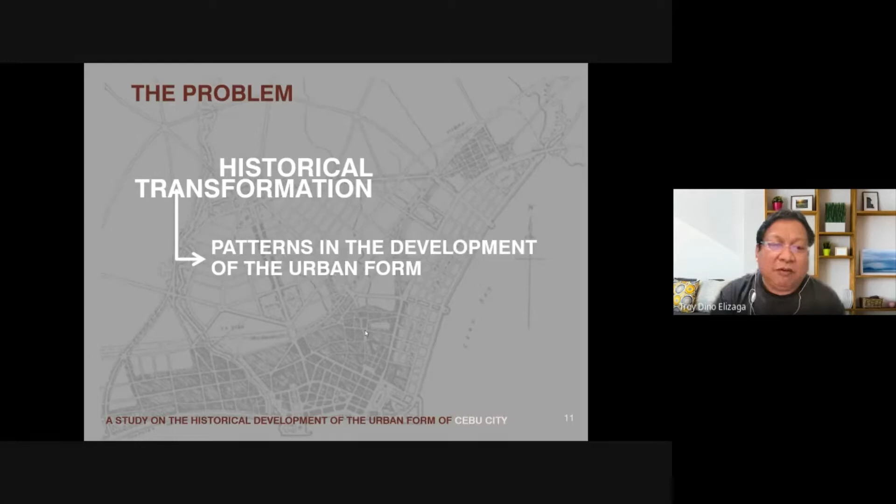So historical transformation means that we have to be looking for patterns in the development of the urban form, and also try to know the historical development in economic, environmental, and socio-cultural aspects.

This study was limited in terms of area, which is the urban area only of Cebu, not the rural area. We're also limited by the availability of old maps, and the boundaries are not so clear in some barangays. There's also an analysis of street and plot patterns involved.

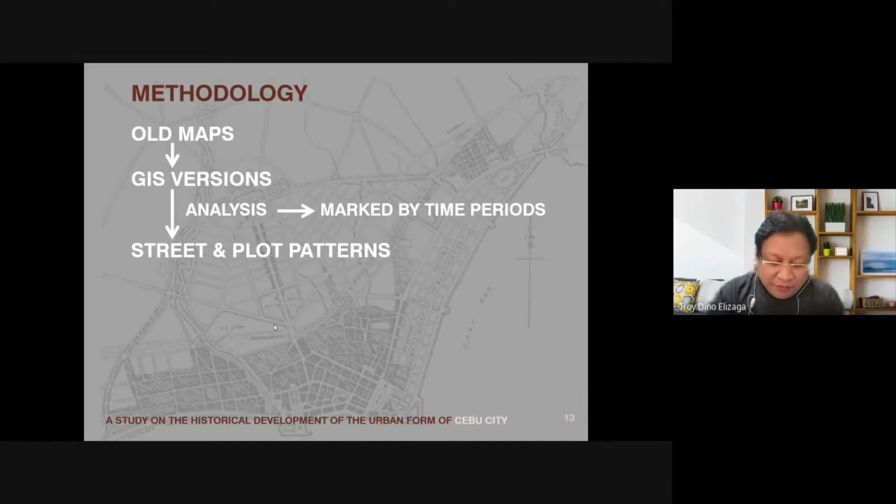Basically, from the old maps, I made a GIS version of the map, and afterwards I analyzed the maps, the GIS version, analyzed the street and plot patterns, and then tried to make time-different maps for each time period.

I also studied historical accounts, so that I can determine the changes through time in terms of economic, environmental, and social cultural aspects.

Let's go. These are the maps that I had to consider. There were more maps, but I had to choose what can be useful in my study, what can be translatable to GIS, because some maps were actually just sketches, some were meant for naval navigation, and some were different.

So I ended up with like 16 maps, but from there I was able to generate a map for this particular time period from 1700 to the year 2000. But skipping some decades, I only ended up with like 10 maps.

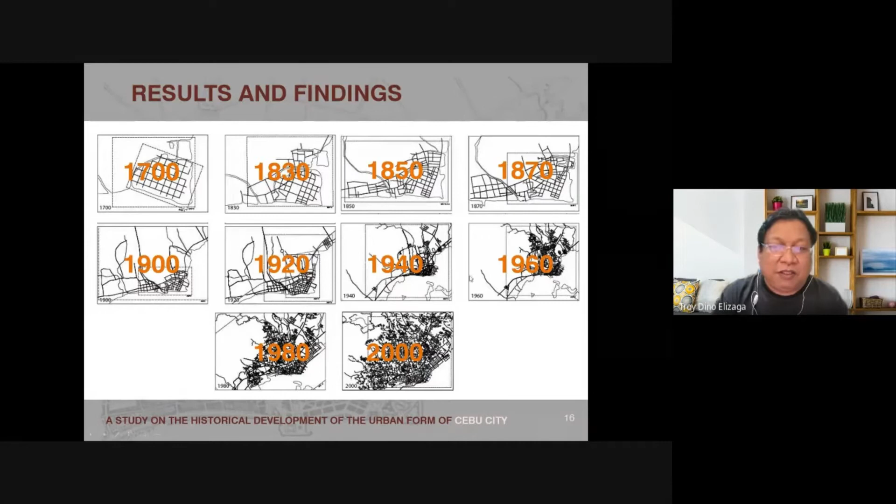So these are the 10 maps. It starts at 1700 - we only have this for Cebu City, for Cebu, and now it's this big. Then we have 1830, 1850, 1870, then the American period: 1900, 1920, 1940, and during Philippine independence already 1960, 1980, then year 2000.

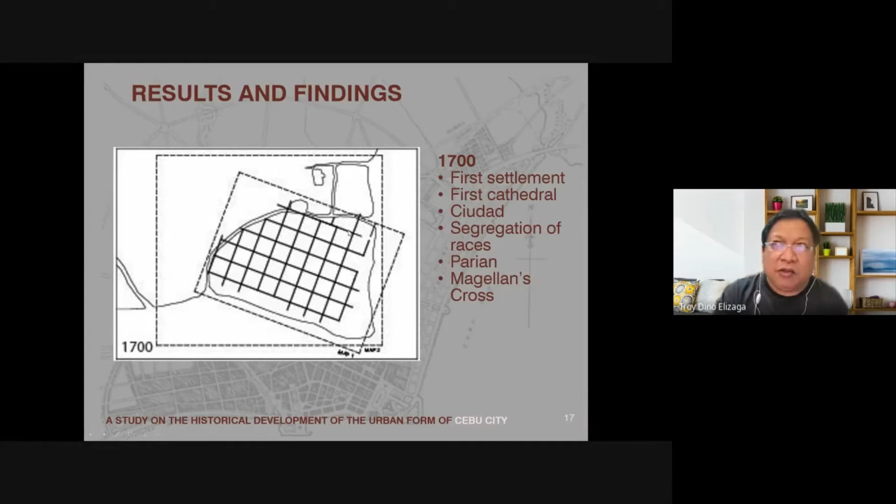So 1700, you can see this part of Cebu - if you don't know where this is, Fort San Pedro is right on the tip here. So the City Hall is somewhere here, Carbon Market is somewhere here. And there's actually a river that enclosed that development. So this is like an intramuros without the walls - intra-rio, inside the river, instead of intramuros because muros means walls.

Much later, the Spaniards had this policy of segregating different races. The Chinese were placed on the north side, so this is Parian. And right across the river, all the Filipinos were placed there. So actually this became San Nicolas, although later on the boundary receded somewhere even further. That's why in the history of Cebu, the San Nicolas area was called Ciudad Antigua - the ancient city - for the Filipinos.

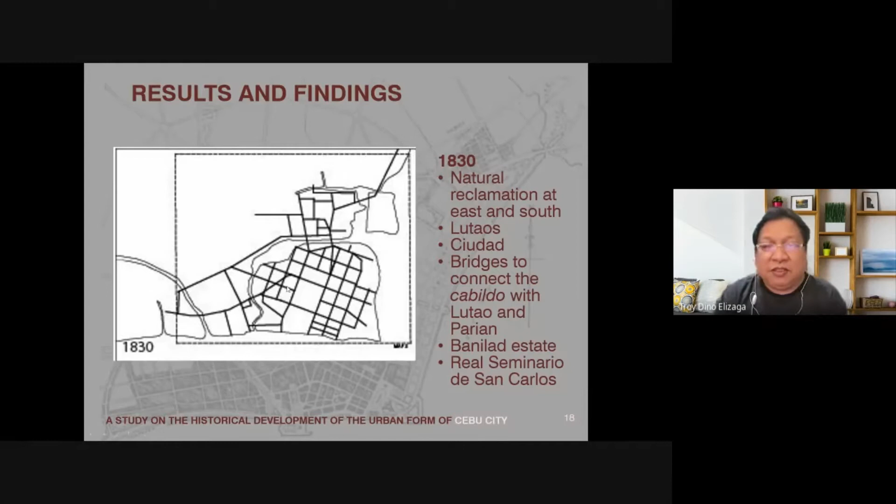You can see how much the development went much later. It is more pronounced in the Chinese area because they have more money. Normally the trade would be between Chinese and the Spaniards, and the Filipinos and the Spaniards, but we cannot avoid Filipinos also doing business with Chinese.

So there was actually a road that connected the two communities later on, outside of the port area, and this is actually Colon - Colon Street that connects. That's why for me, Colon is very significant, because it connected people, aside from separating Spaniards from the American development later on.

In this time, 1850, there used to be a church in Parian, said to be more beautiful than the cathedral because a lot of money was poured into it, since this was the Chinese community. The bishop of the cathedral was said to have had this Parian church destroyed so that the Chinese community would now go to the cathedral, and the money would pour into the cathedral instead.

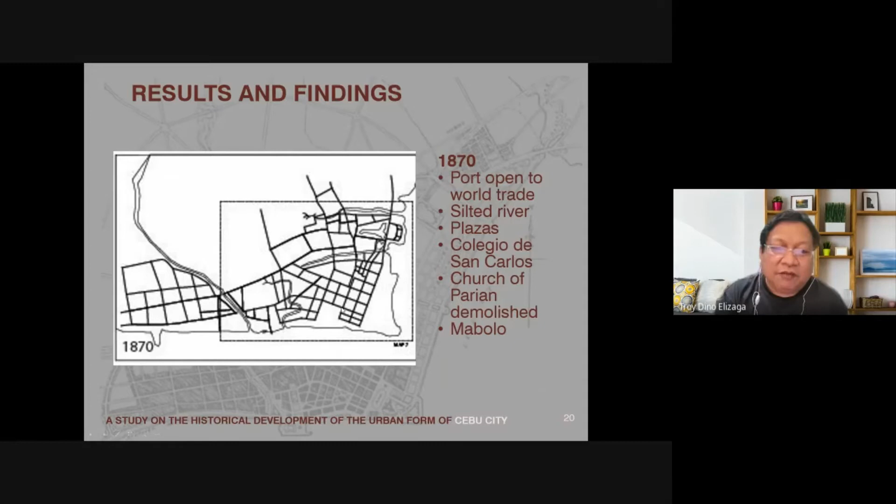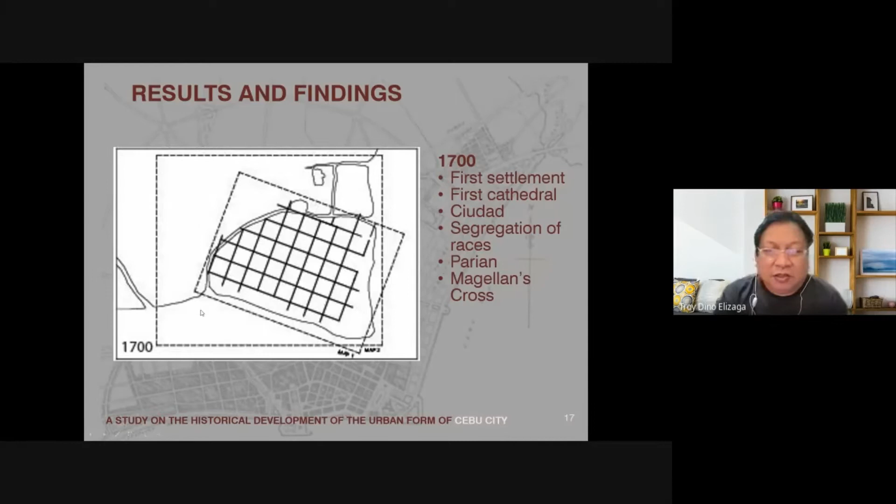Here the port opens to world trade, and if you notice, the coast changes over time. If you go back to here, notice that it's only here. Because the current comes from the west going to the east, this becomes silted and expanded, so you actually have more developments there.

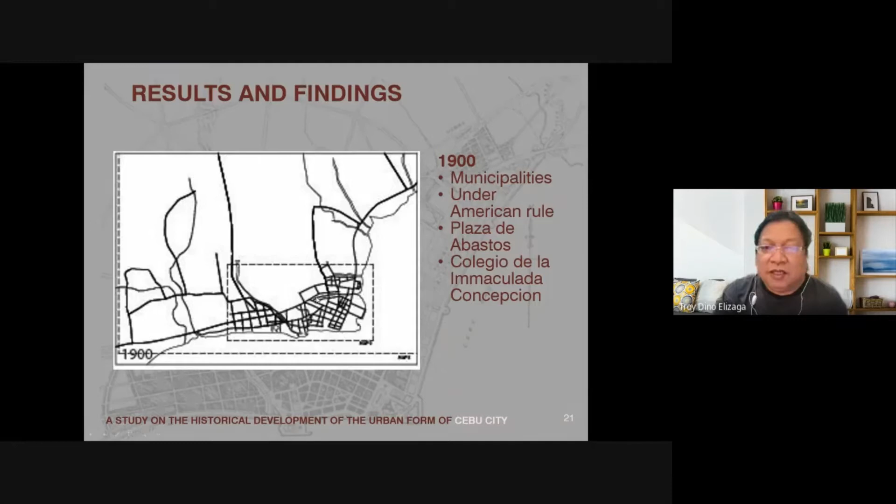1900 is when the Americans took over. The first thing they did was, of course, put in roads to expand to the other parts of Cebu. So you see here the road going to Guadalupe. William Parsons - I mentioned him in one of my lectures about American period heritage resources - made a plan for Cebu. It was during this time also, in 1910 I think, that we have the Fuente Osmeña, which is the first waterworks system in Cebu.

And then there's this big avenue here - it used to be Jones Avenue, now I think this is Osmeña Boulevard. He made a plan, but it was not followed, because when he made the plan, he drew it only on paper and assumed that the whole of Cebu is flat. But some parts of Cebu are actually not flat, but rolling, so some of the roads he was contemplating could not be built.

Also around this time, there was a railway station, a train. There's a railway that goes from north to south, and that also goes inside towards Carbon Market. Cool, no? Carbon Market has a train going there. Now that they're trying to rehabilitate Carbon Market, they should have placed something like that, a train, just to...

...recall the old times. 1940 was said to be the golden era of Cebu. That's the year, at least a decade maybe, that Cebu was chartered as a city.

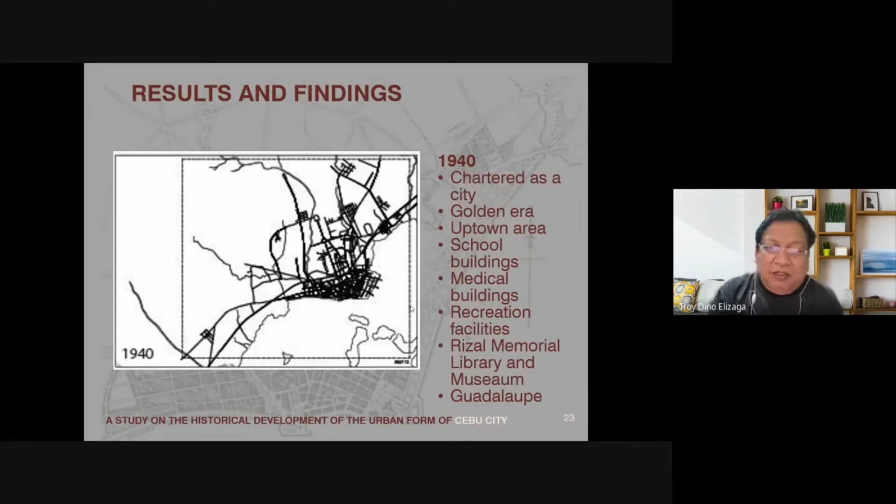The Americans were building many things: medical buildings, recreation facilities, museums, libraries. After the war, Cebu was devastated - I think you've seen a lot of pictures of that. The Americans helped put in a lot of money to rehabilitate the city, but the pace of development was not so fast, so people became impatient and tried to develop on their own, to build outside the plans of the government.

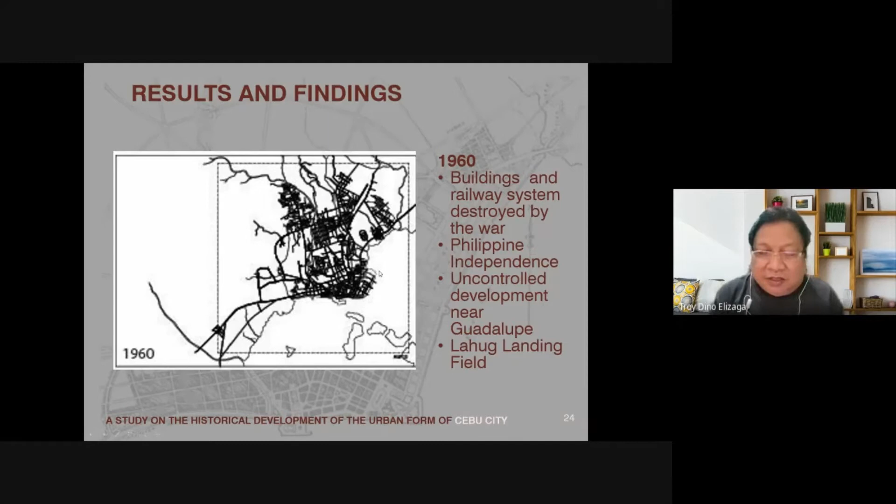That's why you're starting to see some portions here which do not seem to be well planned. The government was not able to control the extent of the development, so that's what happened here.

The government tried to put in, in this case 1980, a reclamation project in the north, which was too soon. In fact, until now this part is not built up. There's still a lot of land available due to speculations, unlike the South Reclamation Project.

Something happened during the 1990s which was very important. There was a very big storm that hit Cebu and really devastated it. It was Ruping, I think in 1990. That's why I don't have a map of Cebu from that time, because Cebu was not mappable. Everything was really destroyed, although what destroyed it was simply wind and rain, not like Tacloban with the storm surge.

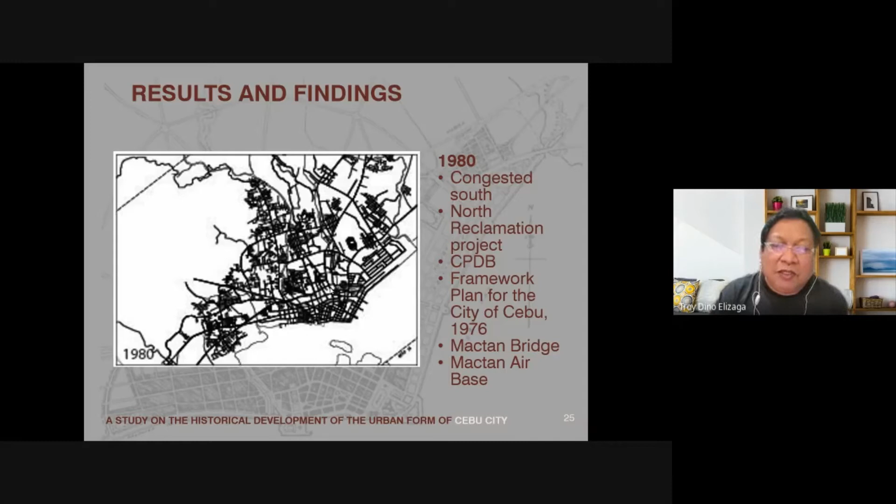For a couple of months there was no electricity, no water. The governor at the time was Lito Osmeña, and he decided to rebuild. His battle cry at that time was 'Ceboom!' So that's where the term comes from, if you ever hear about it. And it was really successful.

Cebu became what it is now, almost like a small Manila, except that the development went so fast that again the government was not able to control people building here and there. So it spread—that's why the map of Cebu looks like this now, really topsy turvy.

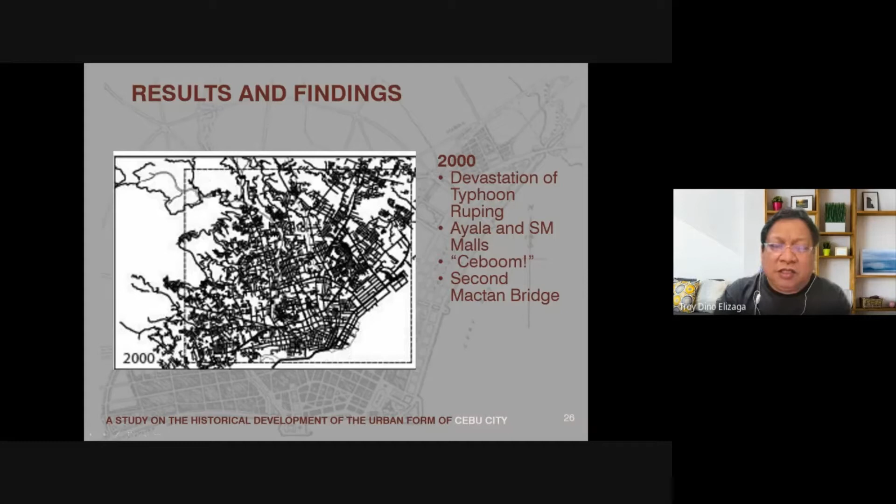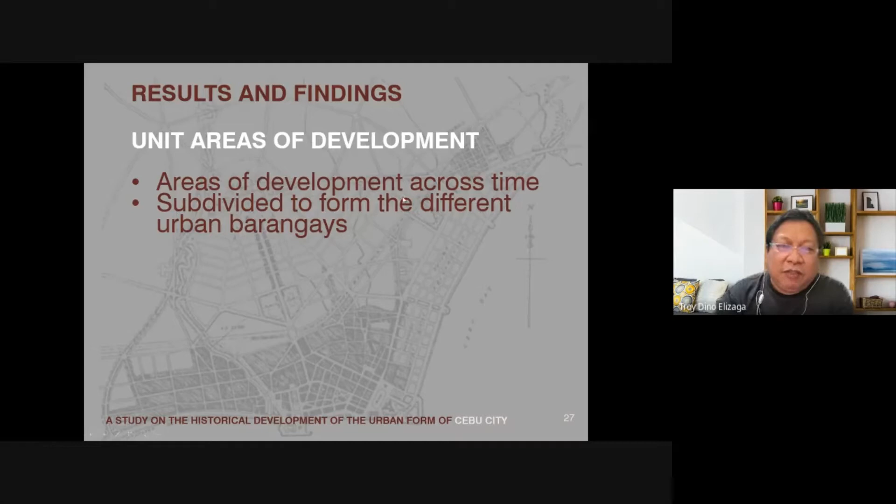After having made those maps, in order to analyze them you have to break them down into small areas which I call unit areas of development—areas of development across time subdivided to form different urban barangays. For example, at this time there were three unit areas of development: this is the Spanish, that's the Chinese, and then the Filipino.

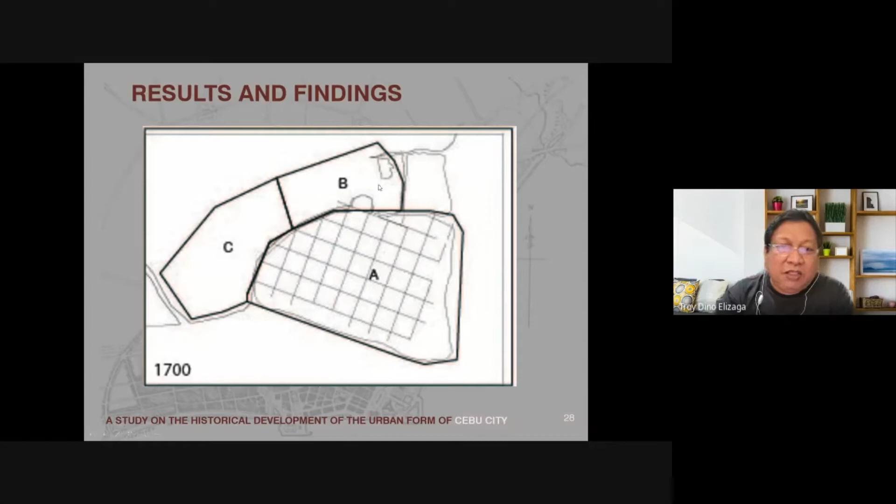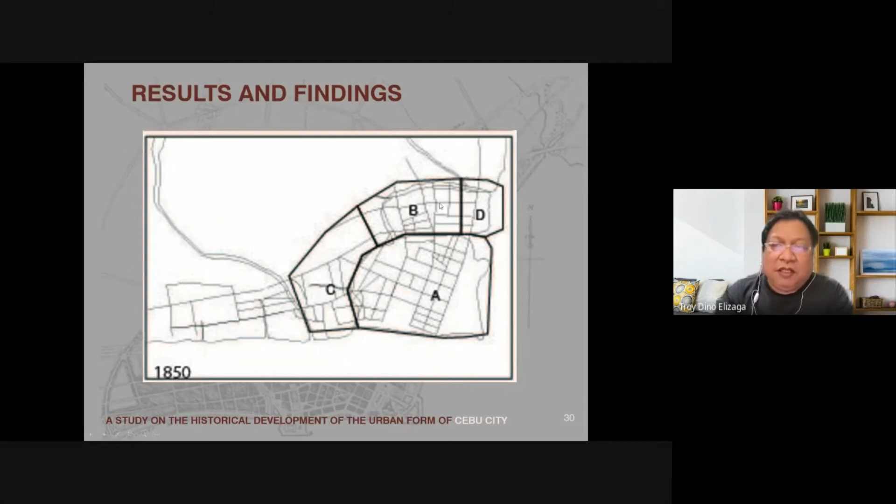Then they expanded, but another area was introduced because these are made up of lutaos or the bajaus, and they're not the same here, so it's not an expansion of B—it's a different one. So they expanded also, and new communities formed here and around, and so forth, until we form this one.

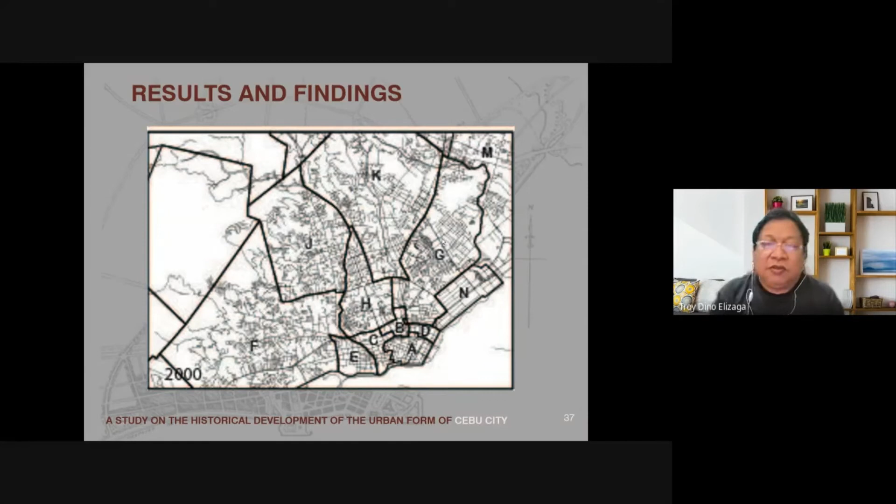Because of the pressures of time, these areas were very big—they were not broken down into smaller barangays. I did not have time at that moment.

Afterwards, the next thing is to evaluate each of these areas to determine what level of development occurred during that time period. That level of development makes use of transect zones, which came from form-based codes.

Form-based codes is something you will learn probably in Planning 2 or 3. It's another way of planning, other than zoning, and it's used also to evaluate existing communities and existing developments. It's very interesting—I'm really into it.

In that form-based code, there was a categorization of development into transect zones, depending on how many houses and how many streets there are in an area. In the natural T1 zone, there are no houses, no streets. Then you have rural with maybe one or two, several in suburban, and then general urban, slowly rising to high-rise in the urban core.

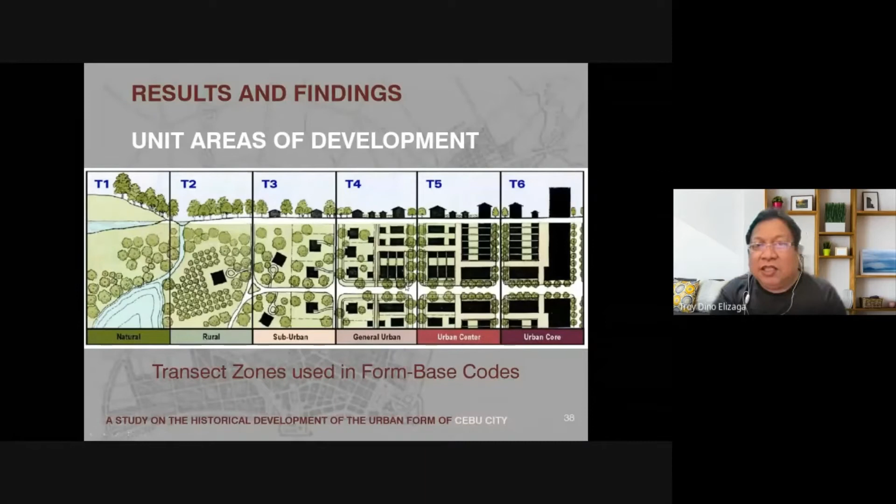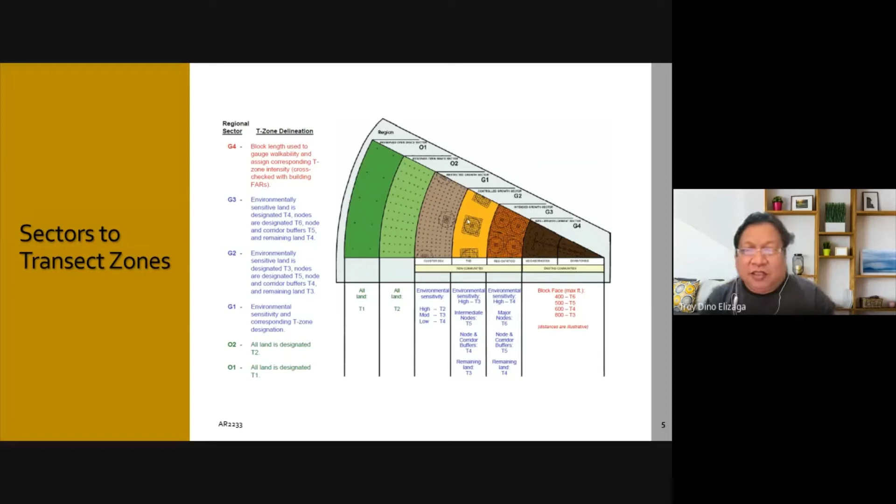So residential development is allowed only from T2 to T6. It's not allowed in T1. Well, maybe this is not very useful, but I really just find this cool.

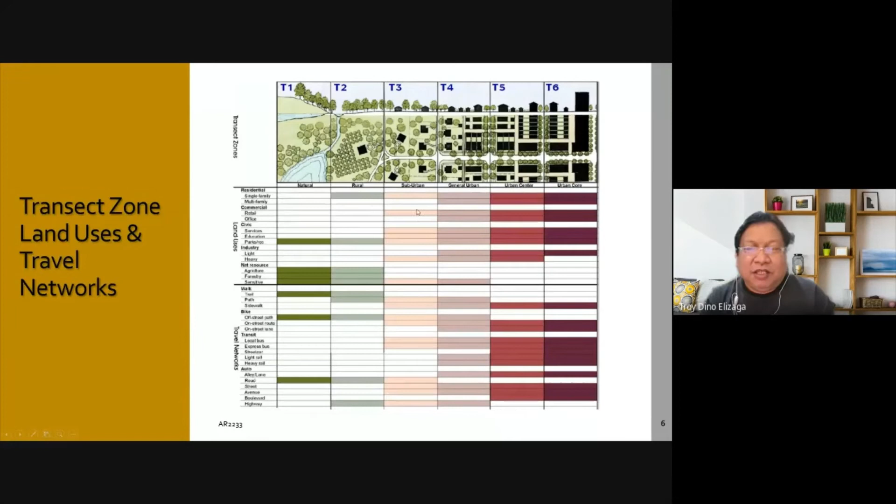So if we are going to design for circulation, our first consideration would be people, and how people travel is by walking. So we have here a standard: a 5-minute walk, which is 1/4 mile. I think 1/4 mile is something like 200 meters.

And then there's also the long standard, which is half a mile. This is 1/4 mile, so this is half a mile. I think this is like 400 meters.

This is normally the standard used for walking towards, say, the train station, but we don't have a train station, and Cebu does not have even buses in the city, so this is normally used as the typical walking distance for neighborhood and bus stop catchment areas.

So the bus stop, or the jeepney stop in our case, is the one in the middle, and it should be accessible by people around a 1/4 mile radius.

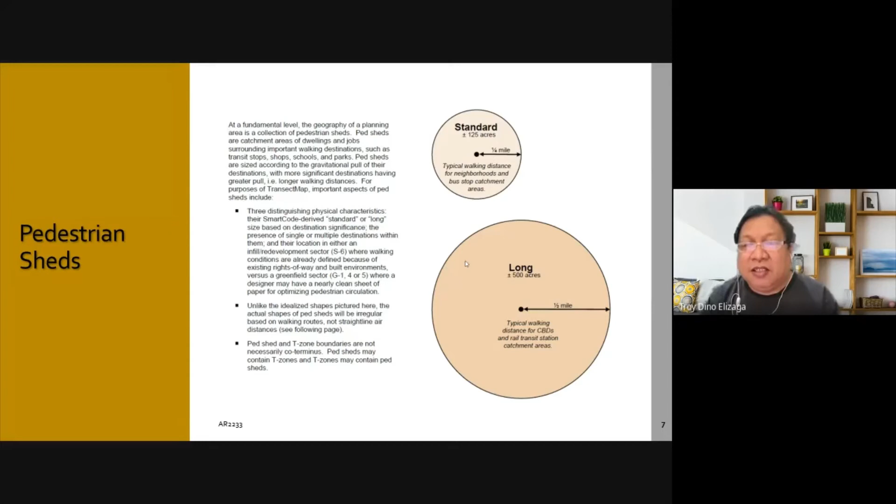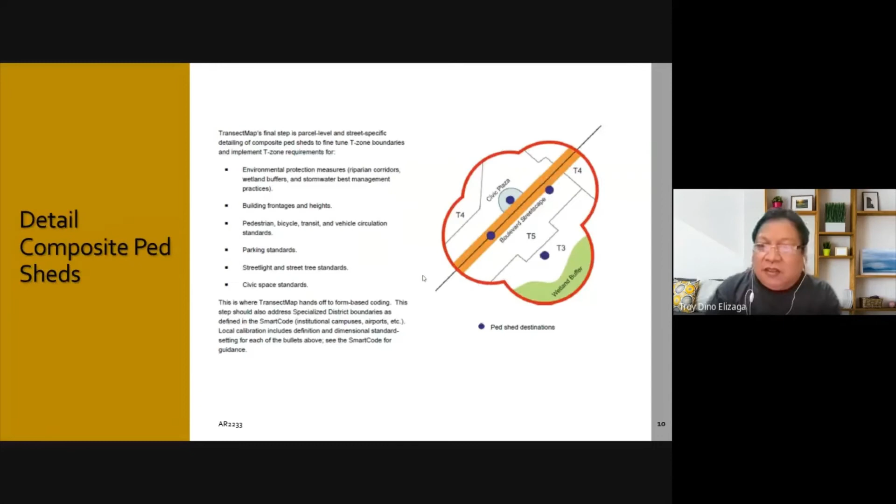Now let's talk about walking distance - meaning people will not ride a car or a motorized transportation system. But if that goes beyond the walking distance, people will choose to ride. If we apply that in a subdivision, say from the gate all the way to the farthest inside lot, if that is beyond the walking distance, people are sure to look for a means of transportation other than walking.

This is an exclusive, high-end subdivision we're making. People have cars, but the people who normally go to the market do not - these are the helpers, like the kitchen staff. Normally they take public transportation, so you have to consider public transportation that goes inside the subdivision, like tricycles. It depends on you if you want to put their terminal right at your gate, or place it somewhere farther so you don't have to bother with it.

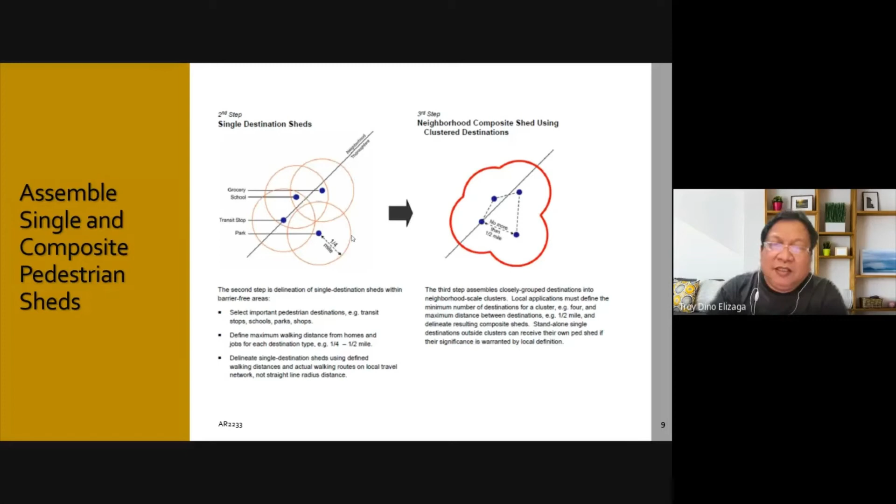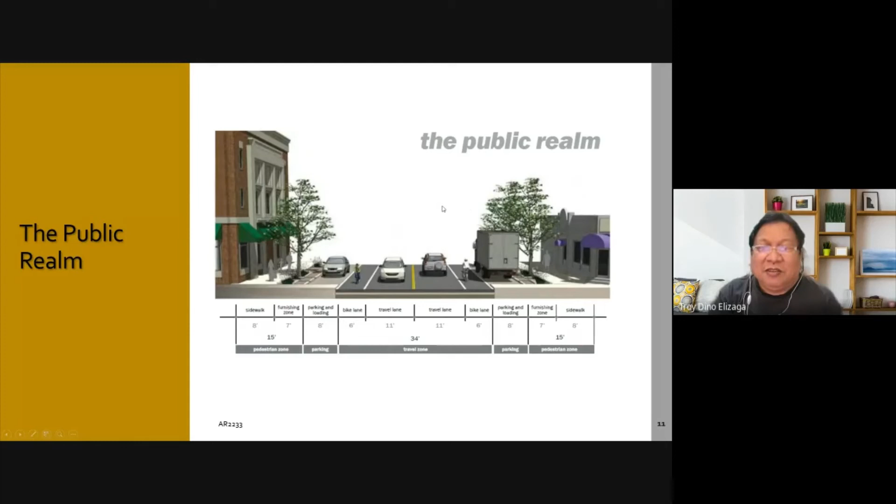Now, when it comes to roads, the type of road depends on the speed of the car and how near you are to your destination, your house. The farther you are from your house and the faster the speed of the car, we're talking about freeways. The roads that serve as contributors of cars to the freeway are the arterial roads, so there should only be arterial roads connected to the freeway.

It's really wrong for the freeway to have houses along the road. Most freeways normally have no parking going in and out, and no houses - the only way to get out of the freeway should be arterial roads.

And then the ones feeding the arterial roads are the collector or distributor, and the ones feeding these collectors and distributors are local roads. Now, in our last lecture, I talked about collector roads, major roads, minor roads, and motor courts.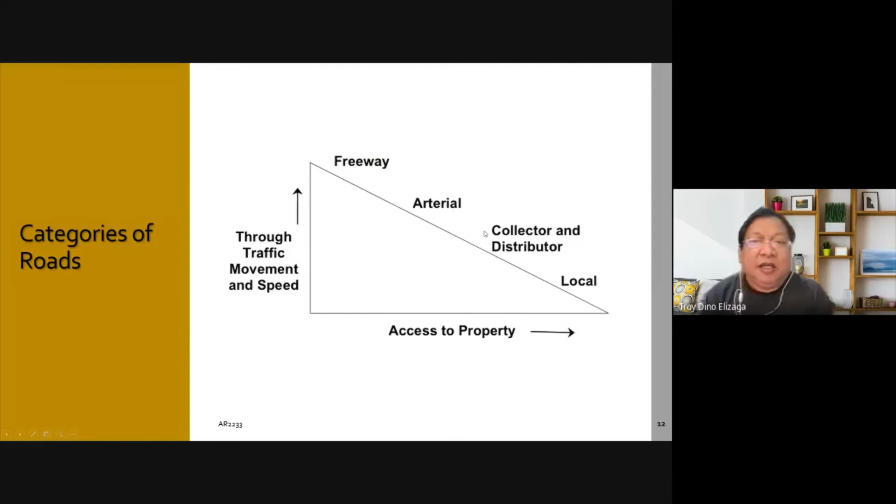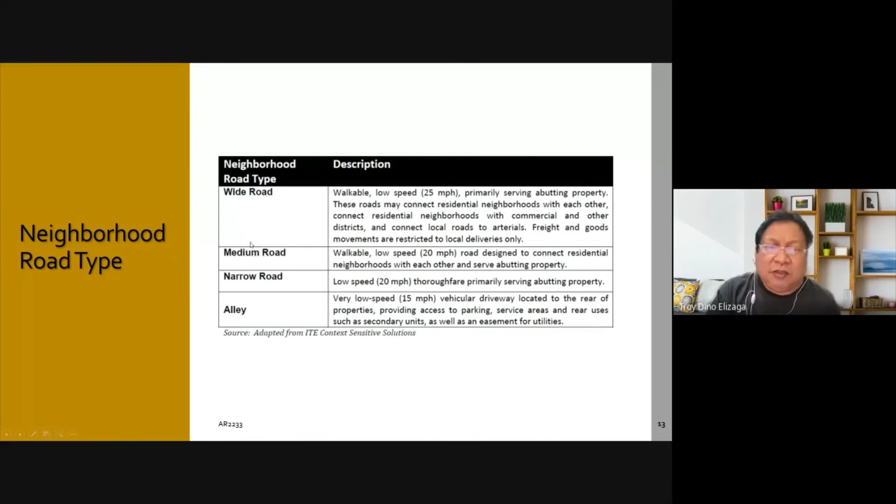For example, here this is in the U.S. They call the roads wide road, medium road, and narrow road. A minor road would be equivalent to a narrow road because the speed is only 20 miles per hour, not 20 kilometers per hour. And then this could be a major road.

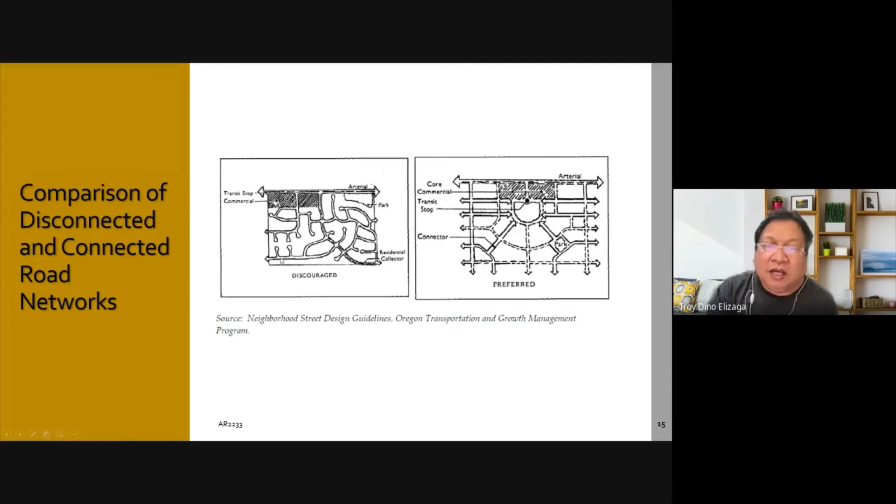This is acceptable only if you're serving just a few houses, to cluster a house, but not to serve as a street going inside and then ending with a cul-de-sac. That's why it says here that this is discouraged, because what is more preferred is that the streets are all connected, so that there are many options for going somewhere else. Otherwise, if there are few options and then there's a bottleneck, it's a big problem.

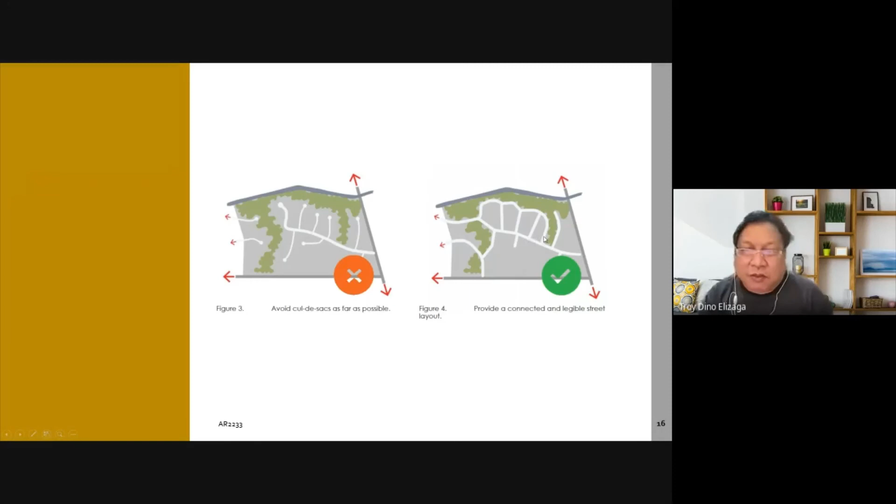So the cars at the end cannot go anywhere else, they're forced to stay. It says here, avoid cul-de-sacs as far as possible, so as much as possible we connect the streets.

Here is a plot of land which is the same as the one on the left and on the right. In the caption, we read: the left is a standard residential land development design with 95 lots that meet the minimum city ordinance requirements for lot size and setback.

But the one on the right is a curvilinear residential land development design with 98 lots that reduces street and utilities by 900 feet. If you notice here, we have one road at the side, and connecting to it are three roads, one, two, and then another one which actually connects the second street and the cul-de-sac. But here we only have one road connecting that other road. So therefore, there are fewer lengths of utilities that you will need compared to this.

So you have fewer roads also, and that makes it so you actually end up with more properties, three more properties, 98 compared to 95. And aside from that, the majority of lot sizes and setbacks exceed the minimum city ordinance requirements, so the plots are actually bigger. So you can see how efficient it is with the same plot, just because the roads were designed differently. Here you have more lots and bigger lots compared to the other one.

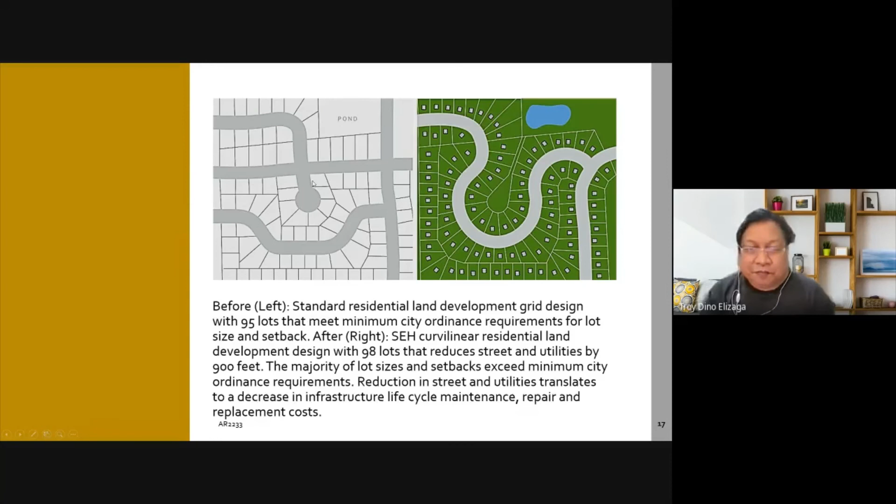So, what to avoid when designing? Intersections should be designed properly, we will talk about that later. And then lots, the form of the lot, should also be designed properly. I mentioned this last time when we talked about the different types of lots.

The first type of lot that was shown is a lot abutting three streets. I told you that this is very rare because it is really something that planners should avoid.

The new access too close to intersection: if this is the major intersection, the new access road towards that street should be 50 meters away from that intersection. That's a code requirement, I think it's in the National Building Code. This is seldom followed.

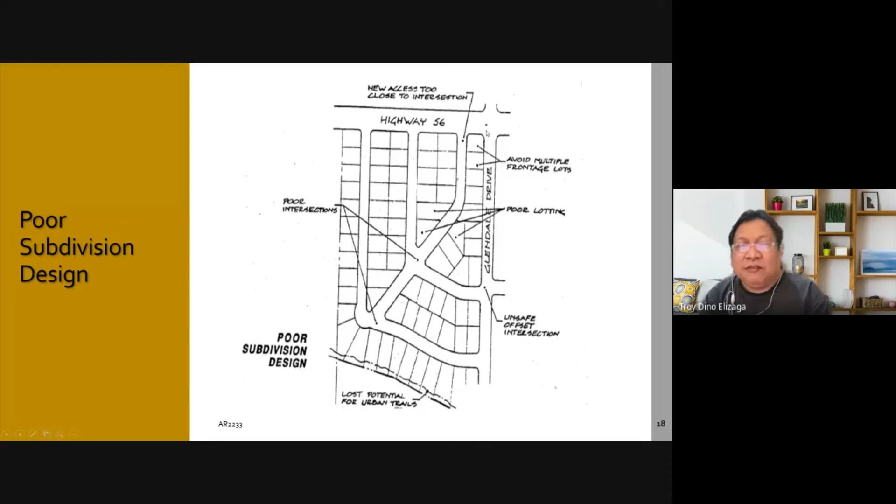So let's see whether it's possible here in the subdivision to follow. What you do is you just try to put the road as far away from the intersection as possible. So a better design is an intersection that forms a T like this, and then that corner lot is wider than the interior lots.

We'll discuss that later.

Utilize T intersections rather than four-way intersections on minor streets. This minimizes the streets connecting to the more major road. If this is a minor road and a major road, you have fewer streets connecting to it, and everything could be inside.

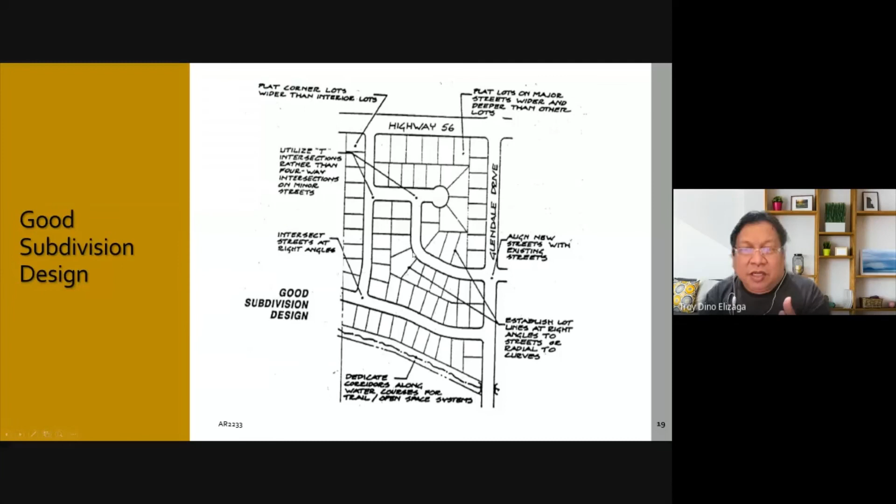Establish lot lines at right angles to streets, or radial to curves. So the sides of the property should be at 90 degrees to the road, or if there's a radial configuration, it should be radial. If there's a turn, it should be radial, not a turn with the lot going parallel. That is not a good way to plan.

Whenever there's a turn and the road is arterial, the turning radius is bigger compared to a collector or much more the local. The turning radius for a local road is only about 13 meters.

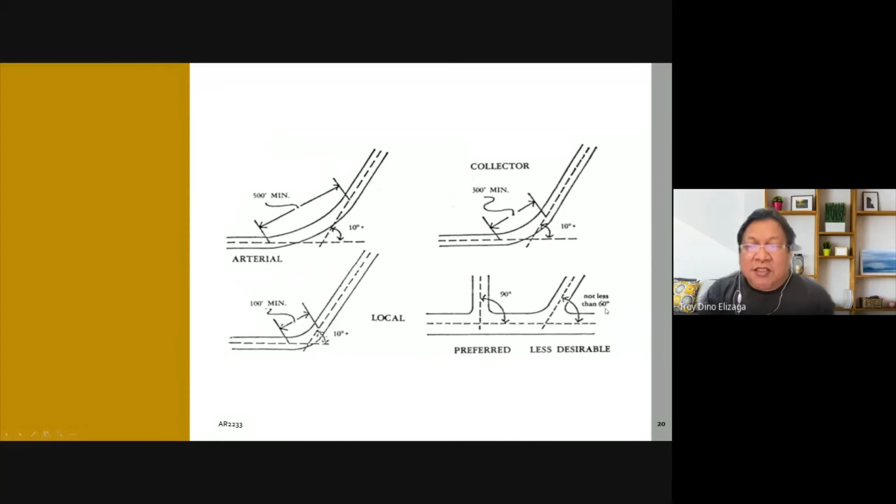If you have a T intersection, it's better if it is at 90 degrees. But if it has to slant, it should not be less than 60 degrees. If it is less than 60 degrees, it's poor, and you end up with a lot configuration that is almost not buildable. But if it's not really 90 degrees, just a bit angled because it bends, you get a better configuration for the lots at the corner.

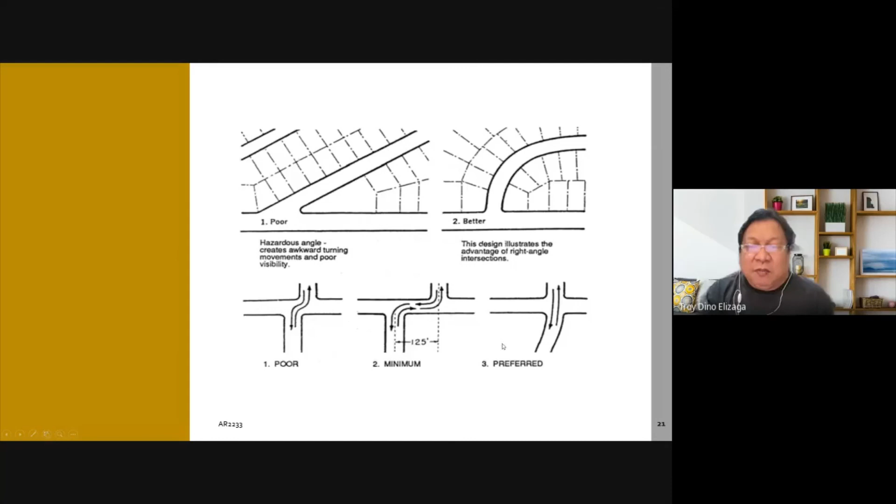If you have a cross intersection, it's not good to offset like this—it's actually dangerous. But if you cannot avoid the offset, there should be an allowance of 125 feet minimum between the offsets. The best option is actually just a through intersection.

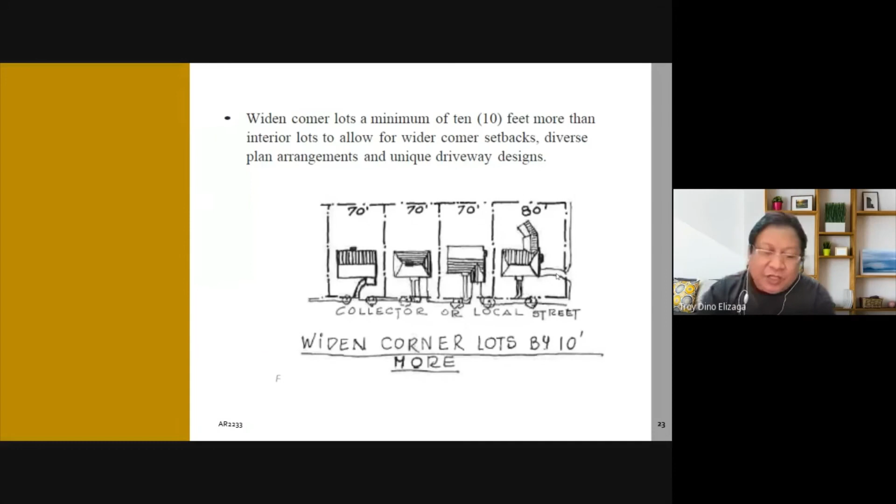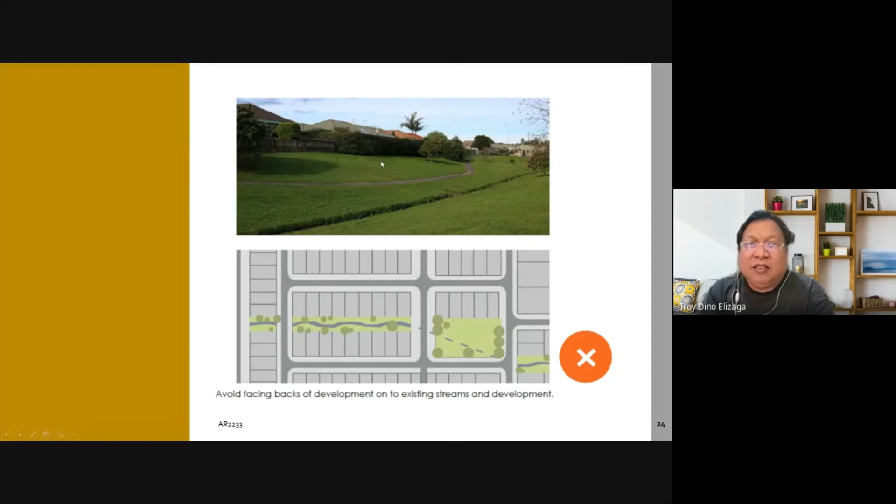A better design is when the fronts of the houses face the open area. This is for natural surveillance—if there are windows there, people in the open area will naturally be more cautious because at any time someone might be looking at them. This is why surveillance is important in design.

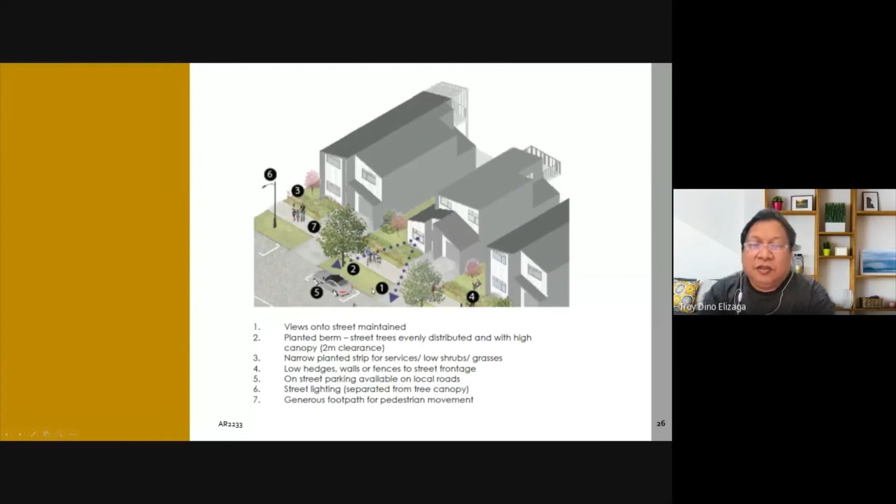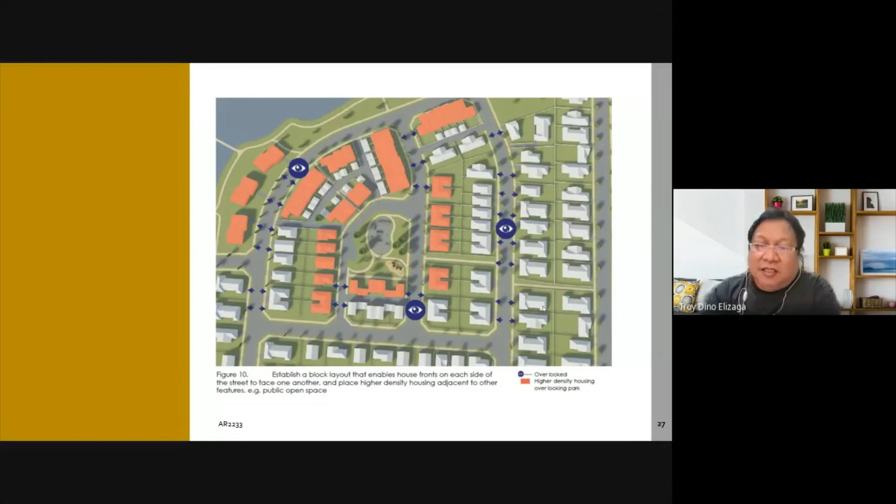The recommendation is to put higher density housing fronting an open space, such as row houses or duplexes fronting the open space, while lower density housing, like some duplexes or especially the R1 detached single-detached houses, can be placed outside. That's the last of the slides.